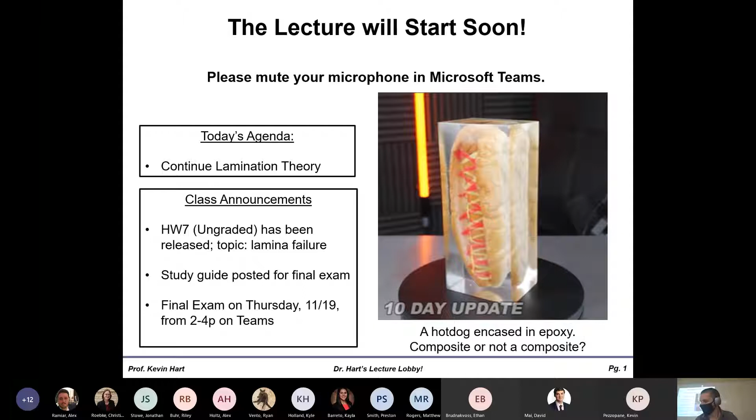All right, let's pick up where we left off. Again, I hope the math pants are being worn today.

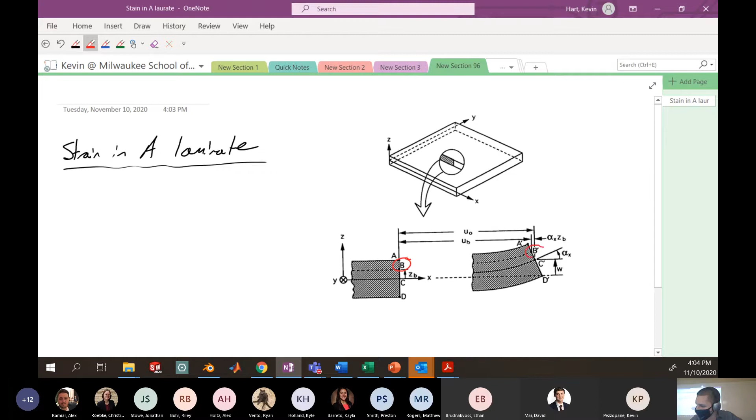So last we left off, we were talking about how to determine the strain at an arbitrary point in the laminate. I'm going to post your favorite picture here one more time—it's one we've beaten to death in this class, but I think it's a nice figure and gives a good picture of what's going on. We've got this plate going from an undeformed to a deformed condition, and we're interested in what the strain is at this arbitrary point in space as we go from B to B prime.

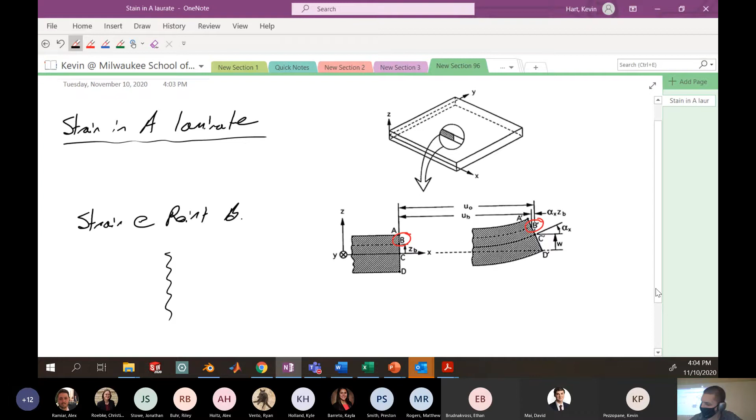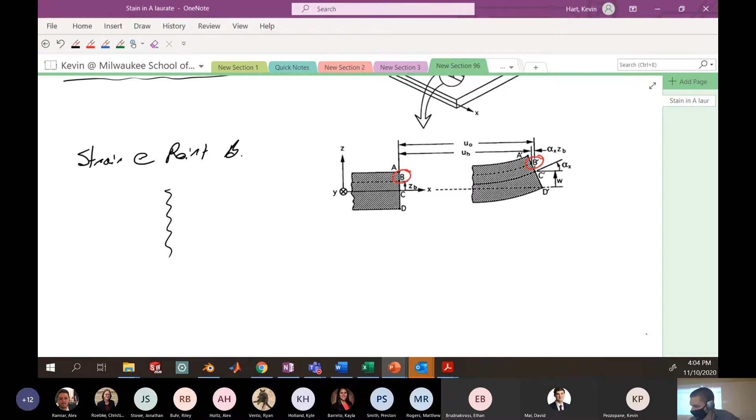We did a lot of stuff—I'm not going to revamp all of it—but more or less we did a full derivation of the strain by determining the displacement at point B before and after deformation, in terms of the curvature and the extension of the laminate. And we came up with this general expression for the strain in this XY coordinate system, and we saw the following.

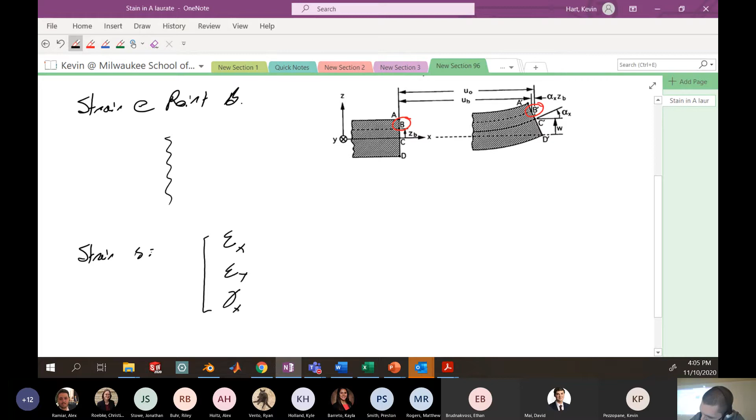In our global XYZ coordinate system, the strain in X, the strain in Y, and the shear strain gamma XY were equal to the midplane strains—epsilon X naught, epsilon Y naught, gamma XY naught—plus the distance the point is away from the midplane, distance Z, multiplied by the curvature of the laminate in the various directions. We're using the variable kappa here: kappa X, kappa Y, and kappa XY.

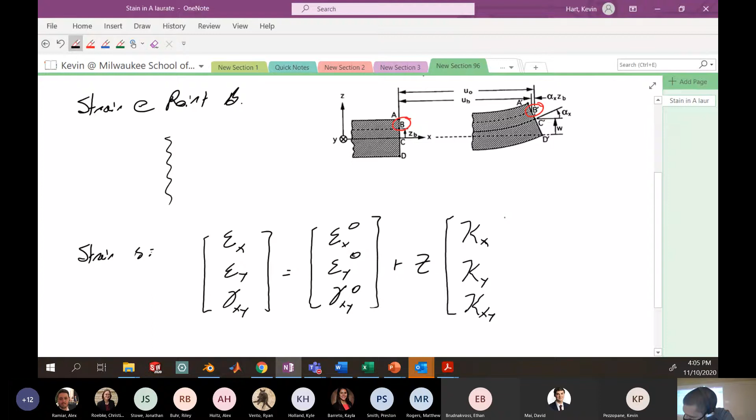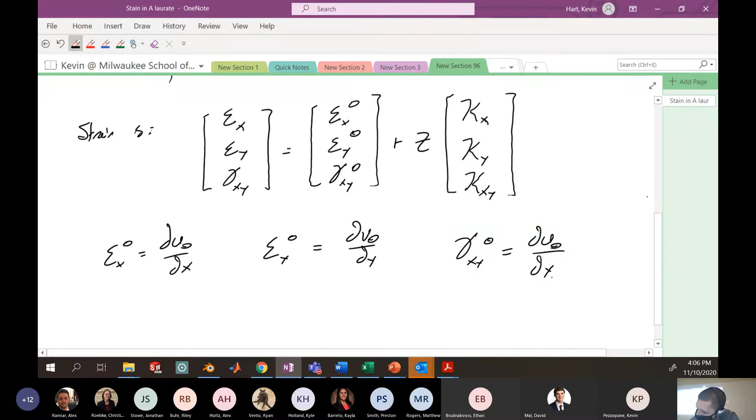We had the following definitions for our midplane strains and curvatures. This was partial U naught partial x, so how much I'm displacing per unit length in the x direction in the midplane. My strain in the y direction at the midplane is how much I'm displacing at the midplane in the y direction for every unit of advance in y. And a similar idea, my shear strain at the midplane is a combination of how much I'm advancing in x with every unit step in y, plus how much I'm displacing in y with every unit step in x.

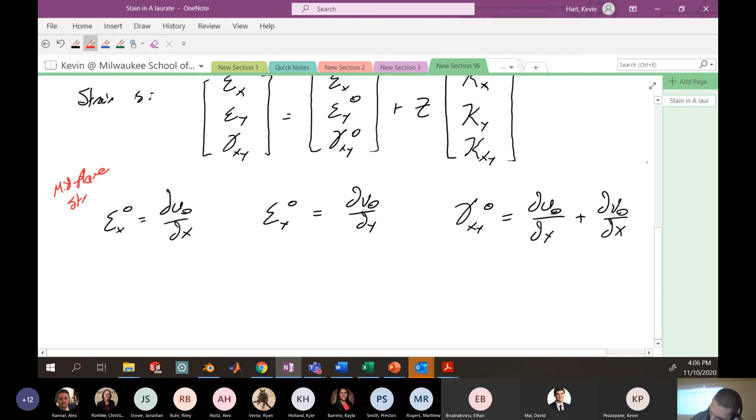All right, so those are our midplane strains. And then midplane curvature, or it's not really midplane curvature, it's just generally curvature, was the following. We had kappa x here.

Kappa x is negative partial squared w, so the second derivative of the displacement in the z direction with respect to x. So this is just a general curvature. You may have seen something that looks like this in your calc class. I don't know if you learn about curvatures in Calc 1 or Calc 2. You guys remember curvatures? I'm getting a lot of blank stares. Okay, I know that was like 3-4 years ago. So, okay, curvature in the x, there you go.

Curvature in the y is negative partial squared w on partial y squared. And this twist curvature, which is sort of like the curvature in shear, is partial squared w with my two partial derivatives, partial x, partial y. All right, so these are my definitions that I'm going with.

Okay, so that's generally the strain that occurs in a plate. Now, we haven't really talked at all about laminate, it's just generally for a plate. So now we've got to look at what's happening at the laminate when we have multiple layers of prepreg that we may have stacked on top of each other. Now we have some sort of expression for the strain and how that develops.

So let's use that and develop an expression for the stress. Stress in laminated composites. This is sort of the next section that we're getting into. This is new material, we're not reviewing any more material at this point.

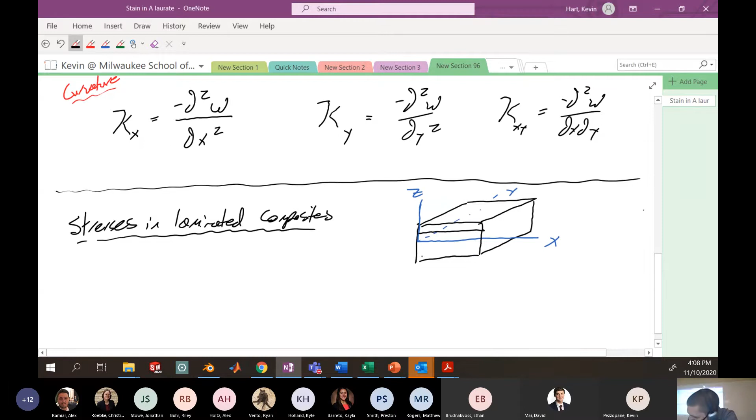So remember that laminate is made up of many, many layers. We've kind of only looked at a full plate, but we'll have to remember that in this class we talk about laminates as composites with many, many layers. Okay, so let's say that we have a 4-layer laminate that looks something like this: layer 1, layer 2, layer 3, and layer 4.

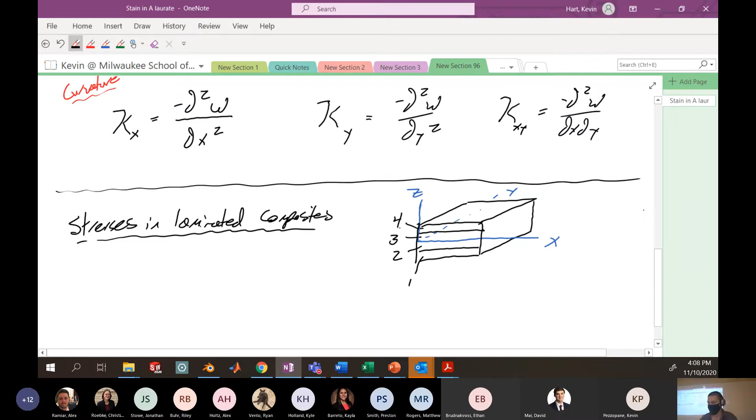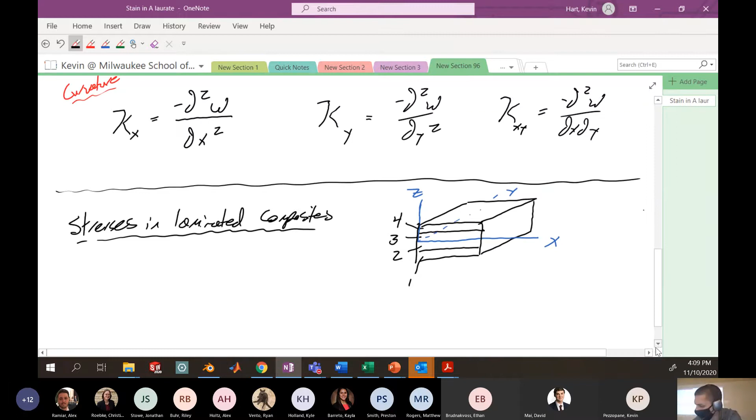And let's say that I'm just at some arbitrary kth lamina. All right, so remember that we could describe any particular lamina of interest as the kth lamina. So let's investigate the kth lamina.

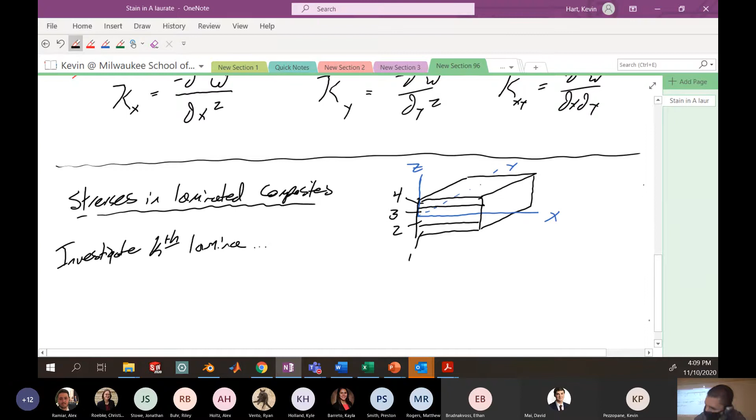Okay, so we know that any particular location inside of the laminate we can define with a variable z. It's the distance above or below the midplane of the laminate. We can use this to define that location for the kth layer with zk. We talked about that when we first defined how to find the laminate. So, distance to kth layer in the z direction is zk.

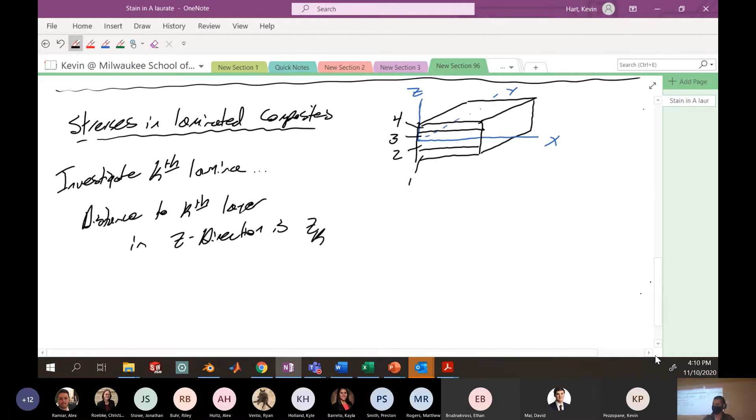So this allows us to define how far away from the center each particular lamina is in the stack, zk. All right, so why is this important? Well, if we know the general strain in the laminate from the definition we just did in the last lecture, we can use Hooke's law to define the stress.

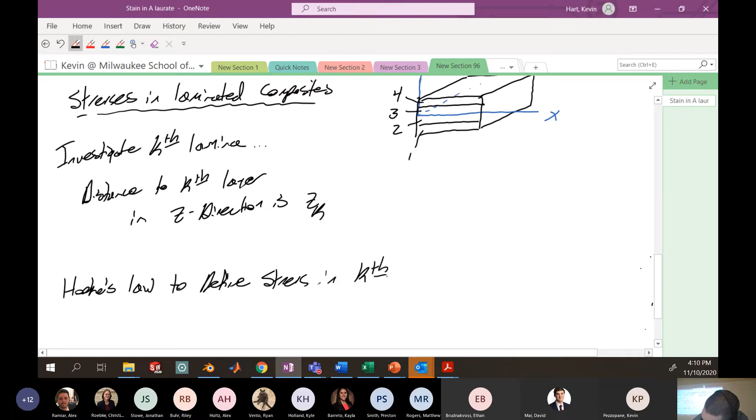So Hooke's law defines stress in the kth layer. And for now, we'll just do this in principal coordinates.

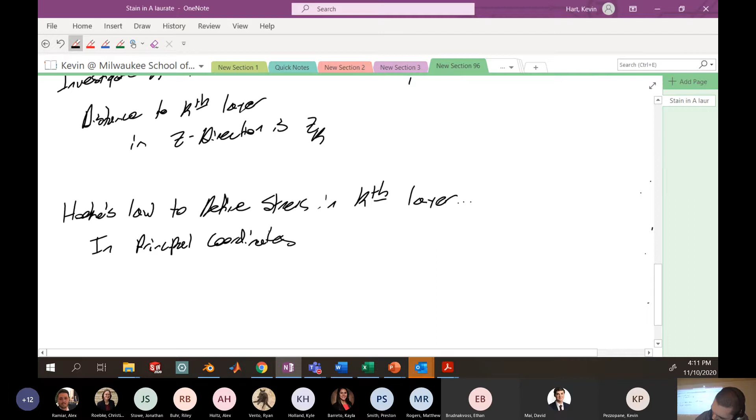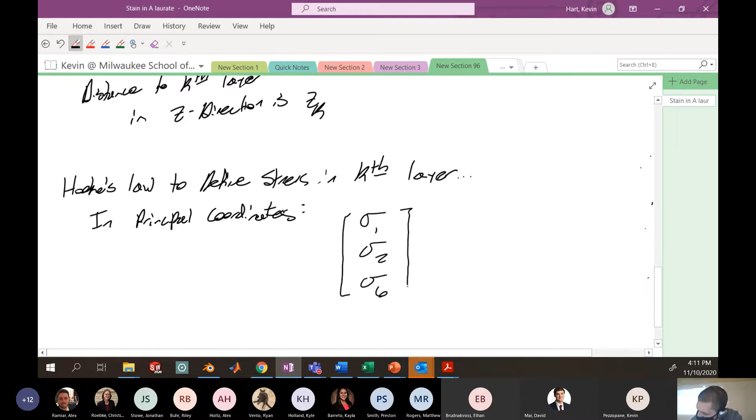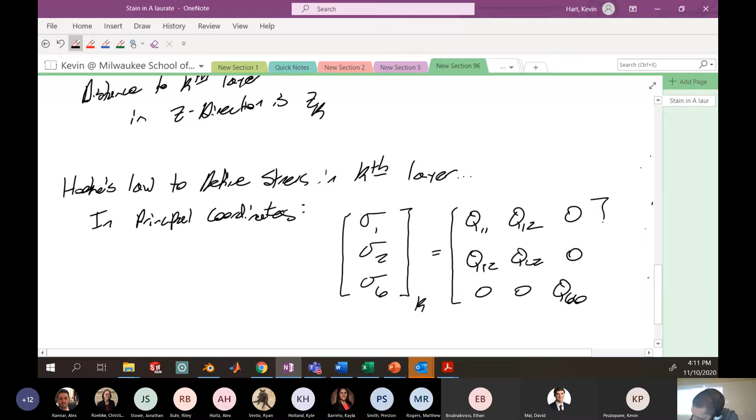Okay, well we know that this is something like stress 1, stress 2, stress 6 in layer K, using the subscript K here. This is the Q matrix: Q11, Q12, 0, Q12, Q22, 0, 0, 0, Q66. This is my stiffness matrix for thin lamina, multiplied by the strain in that particular layer.

So here we'll have epsilon 1, epsilon 2, gamma 6, specifically in the kth layer, right? So this is specifically Hooke's law in the kth layer and principal coordinates, right?

But what I just derived previously was an expression for strain in the arbitrary XY coordinate system, all right? So remember that when we make laminates, the various layers inside the laminate might have various orientations of their fiber direction with the global XYZ coordinate system. All right, we talked about that when we talked about stacking sequence.

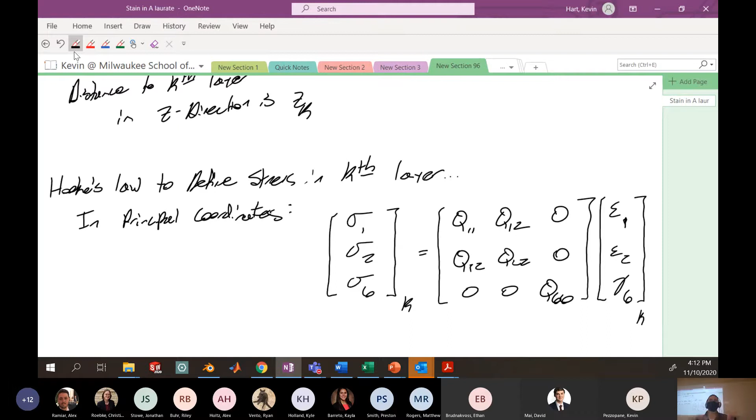If I made a laminate that's 0, plus 45, minus 45, 90, that means the first layer is oriented in the X direction, the second layer is plus 45 from that, the third layer minus 45, etc. Okay, so what I need to do is transform the strains that I know in the XY coordinate system to the local coordinate system of each particular layer to determine the stress in that layer.

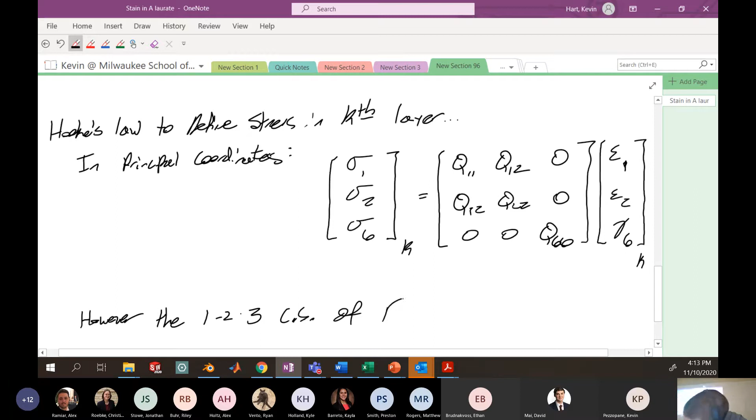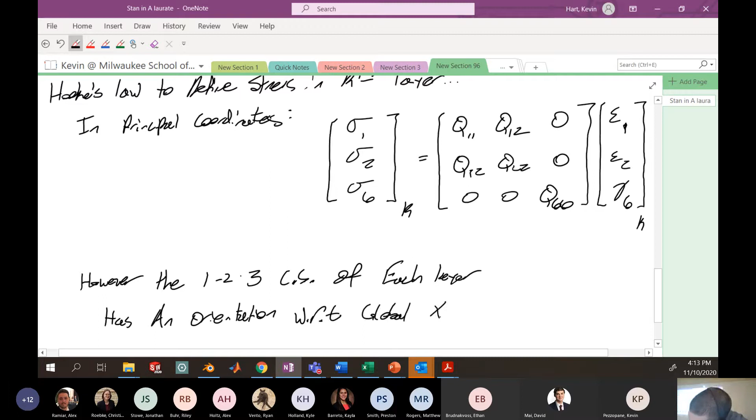Okay, so I'll say here, however, the 1, 2, 3 coordinate system of each layer has an orientation with respect to the global X, Y, Z coordinate system at angle theta k, right? And we sort of talked about this. What is the orientation of the fibers in the kth layer with respect to the global XYZ coordinate system of the whole composite laminate, right?

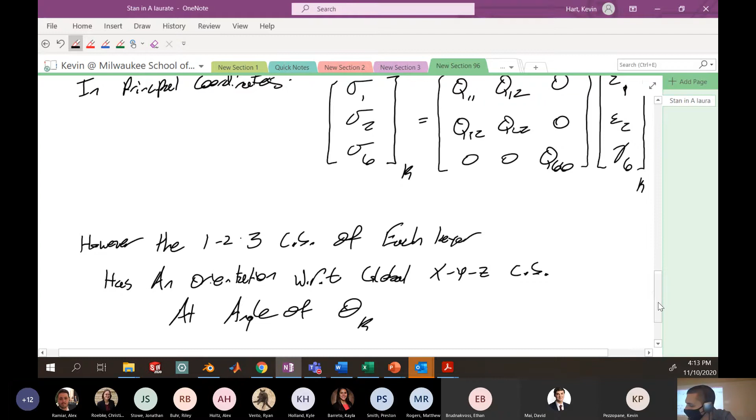So we can transform layer K from its local material coordinate system into the global coordinate system by using transformation theory that we've talked about before. So let's transform what we know about the strains in the arbitrary, or like the global, coordinate system into the local coordinate system.

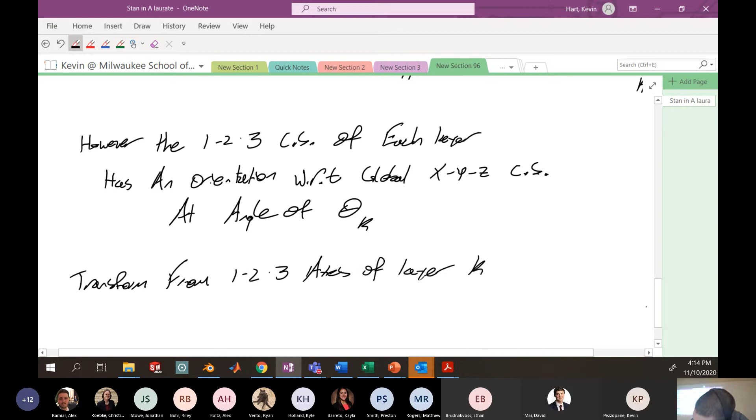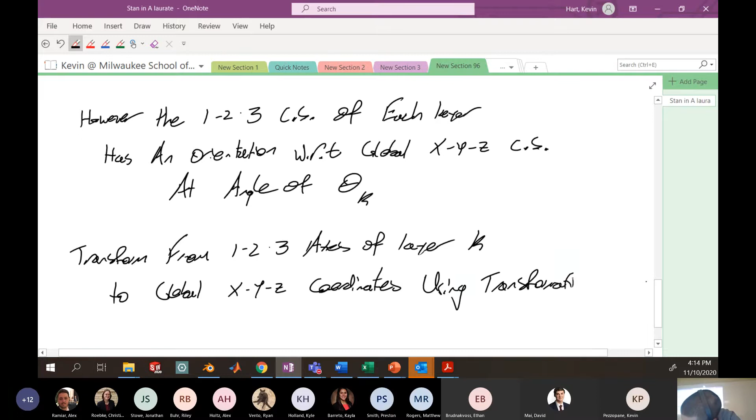Okay, so we're going to transform from the 1, 2, 3 axes of layer K to global XYZ coordinates using our transformations. Okay, that's going to look something like this.

The stress in X, Y, and shear stress tau XY in the global XY coordinate system. All right, so these are specifically the stresses in X, Y, and tau XY for layer K of interest here. One particular layer is going to be equal to my transformation matrix T in plane stress. And it might be a little bit more appropriate to say something like T with the variable of interest here at theta K, inverse.

My plane stress transformation matrix, so this is a 3x3, multiplied by Q for layer K, okay, so it's my 3x3 stiffness of this particular layer K. This is in material coordinates. So let's maybe make this a little bit more clear. I got to make this as clear as possible.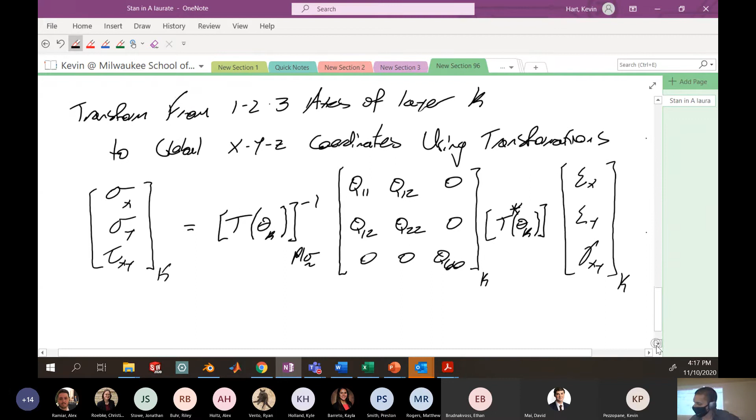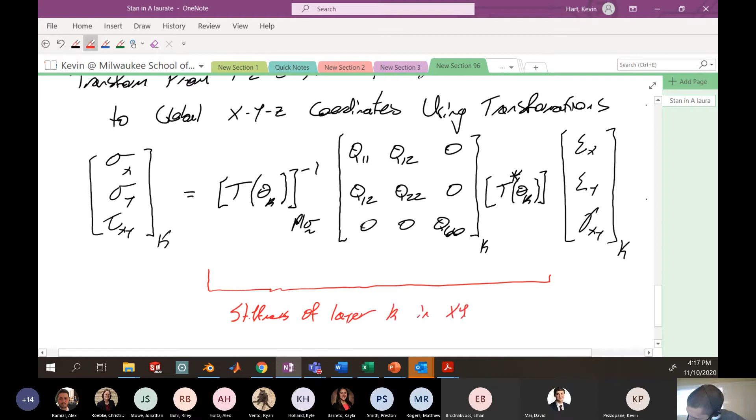So remember that we called this the stiffness matrix in the global XYZ coordinate system for layer K. And remember we called this Q bar. It's usually how we denote it.

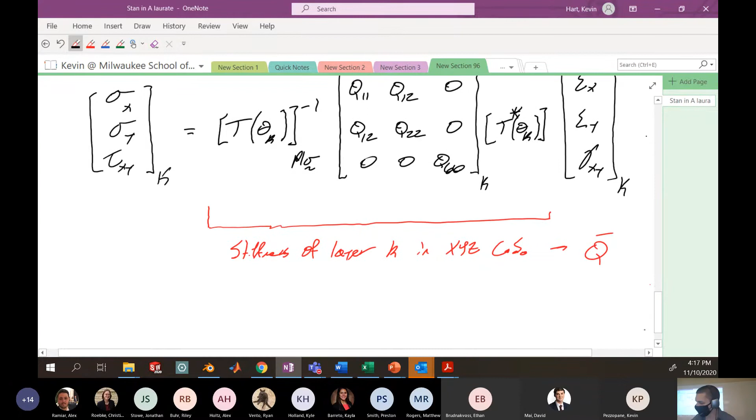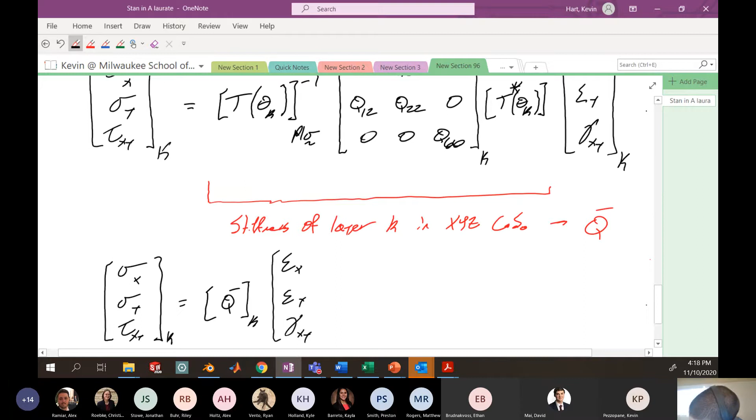Okay, so if we wanted to write this in a little bit shorter hand, we could write something like Q bar of layer K multiplied by strain X, strain Y, shear strain gamma XY, layer K.

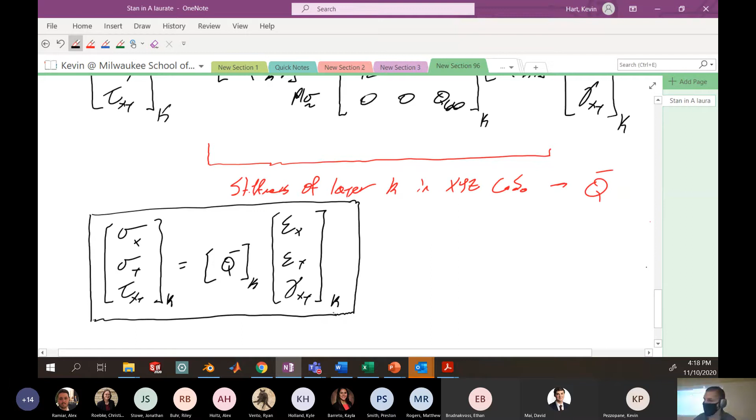All right, so this is kind of an intermediate Hooke's law that we sort of already kind of knew, but I'm just defining it very specifically for one particular layer of interest. Okay, where this is sort of like the stiffness matrix of layer K that has been rotated into the XYZ coordinate system so that we can do calculations appropriately.

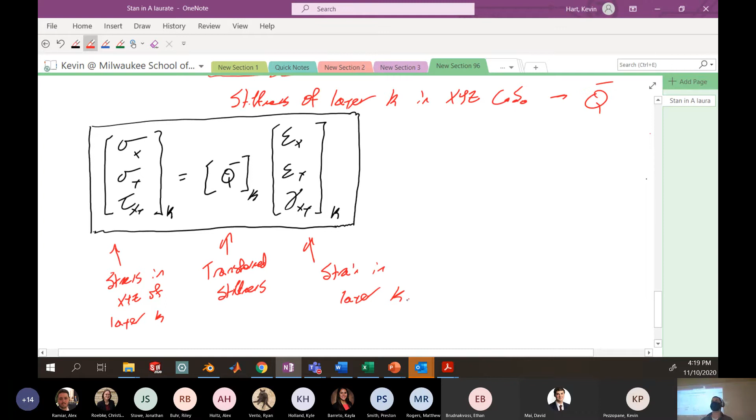So here's the stress in XYZ of layer K. This is my transformed stiffness, and then this is strain in layer K. All right, but I have an expression for the strain in layer K that I can sort of expand on at this point.

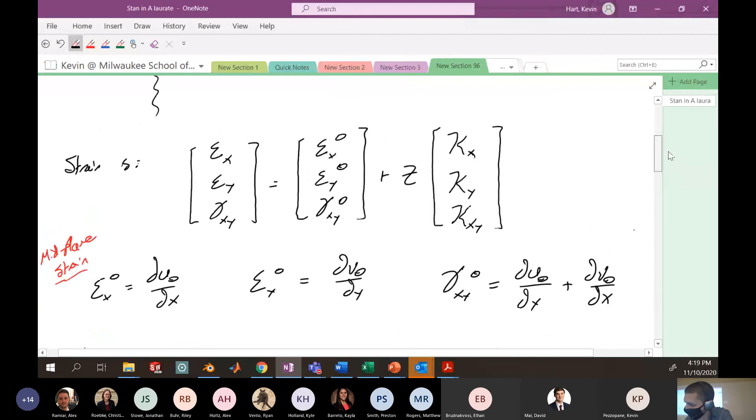Okay, specifically, the substitution we're going to do is that I know the strain in layer K can be written using the distance away from the midplane, ZK. My previous definition of strain is this. So all I'm going to do is put subscripts K on that definition of strain and see what pops out.

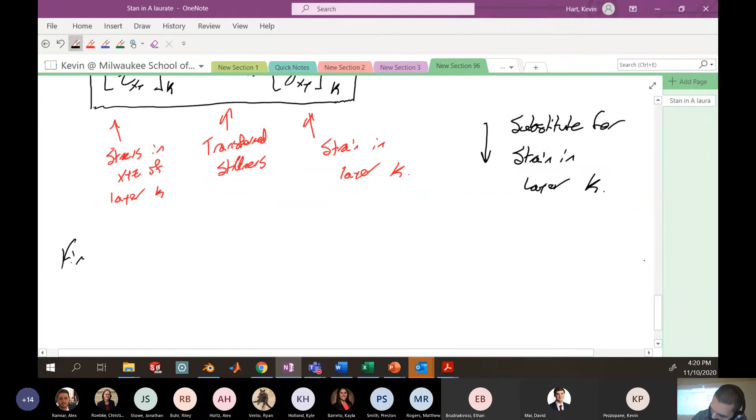So leave yourself some space here. This one's pretty tight.

The stresses in the global coordinate system of layer K are going to be equal to this Q bar matrix of layer K multiplied by the expression that I have for the strain.

And remember, that expression is something like the midplane strains plus the distance away from the midplane, which we're calling ZK, multiplied by the curvatures: kappa X, kappa Y, kappa XY.

I can distribute this, and you're left with kind of the shorthand version of this full relationship between the stresses that develop in layer K and the strains that we have in our laminate, given the stiffness of the individual layer K.

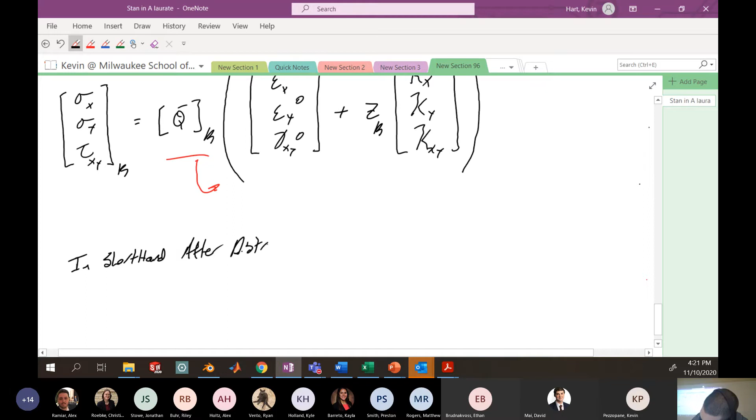So finally, in shorthand, after distributing Q bar, you're going to end up with what we have here.

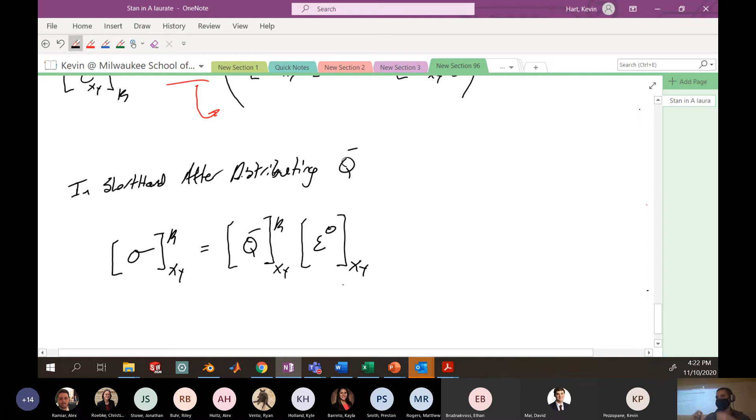This is the stress, usually written this way, of layer K in the XY coordinate system. This will be equal to the rotated stiffness matrix Q bar in the XY coordinate system of layer K, multiplied by the midplane strains of the laminate in the XY coordinate system. Notice there's no specification for layer K here because these midplane strains are just what's happening at the midplane.

Plus your distance away from the middle, we call this ZB or ZK, your distance away from the midplane, multiplied again by your stiffness matrix Q bar XY of layer K, multiplied by the curvatures which develop, kappa XY. Again, not specific for any layer K for the curvatures, because this is for the global plate itself.

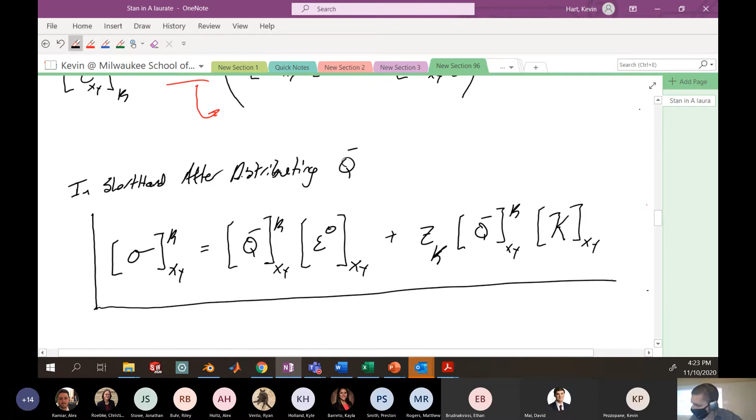So here's your full relationship between the stress that develops in layer K and the strains that develop.

Okay, so let's drive home each one of these terms. This is off axis, so global coordinate system, stress in layer K.

This Q bar K term, this is off axis lamina stiffness, layer K. This term here is the longitudinal midplane strains.

Okay, so that's how much the laminate is expanding and contracting at the middle. This is your distance away from the center of the laminate, so this here is distance of lamina K from midplane.

This we've already defined. And this guy here, this is the laminate curvatures.

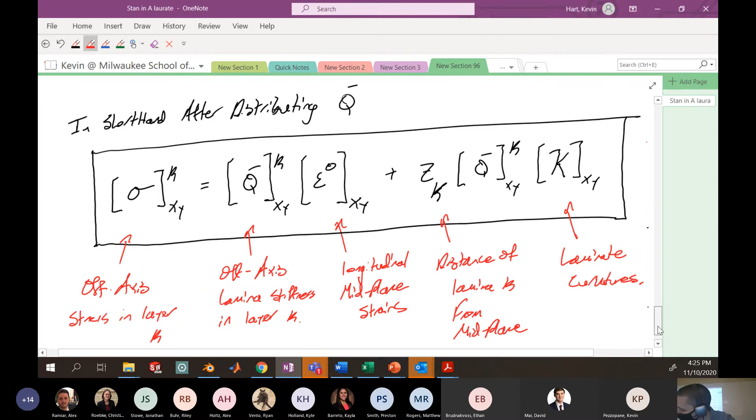Just like the derivation of strain in a plate, it's just very obvious, it's just obvious. Don't stop, hammer time. All right.

Yeah, we got a bunch of gobbledygook here. Sure, fine, let's put some physical meaning to all of this stuff, okay? And let's actually look at what a stress distribution and a strain distribution in a laminate might actually look like.

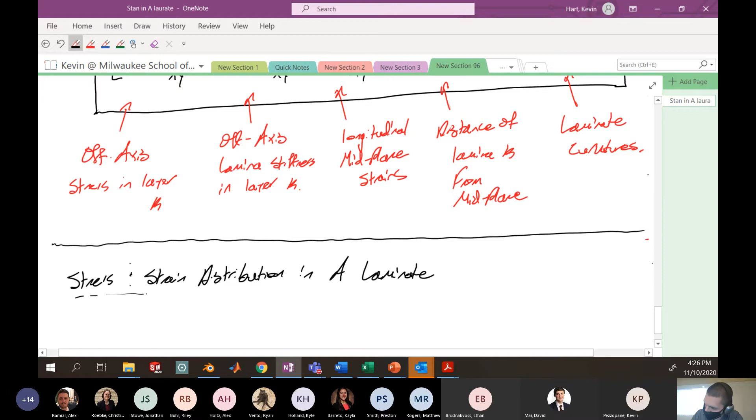So this is stress and strain distribution in a laminate. We're going to do our best to put a physical meaning to the equations that we just drew. Okay.

So remember an assumption that we made, that strain is continuous through thickness.

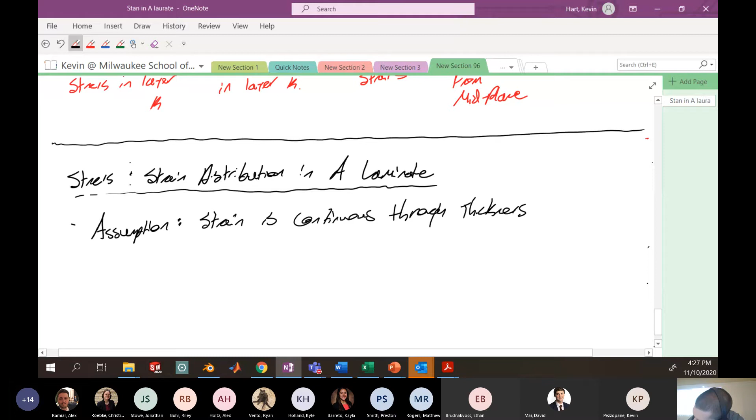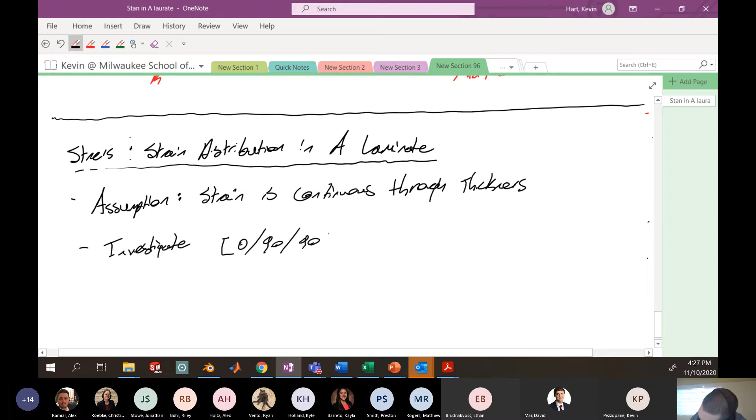Right, and let's assume that we have a multiple layer laminate. Let's say that we have like a 0-90-90-0 laminate. And let's investigate.

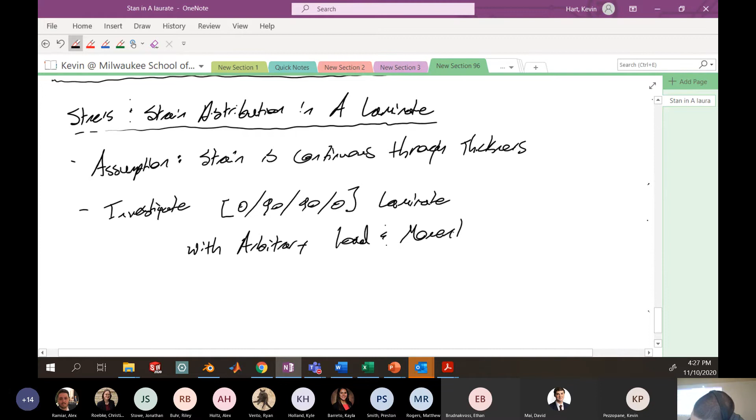With arbitrary load and moment. All right, so what do I mean by that?

All right, well, let's draw a picture because pictures are great. So here we have some side view of some laminate, X direction, Z direction. And let's say that we're going to load this particular guy.

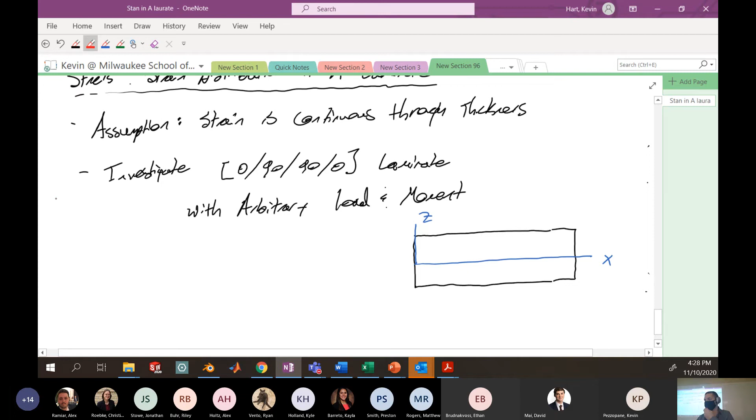Going to put some tensile force in the X direction. And let's say we apply some bending moment, My, bending moment My, that's applied on this guy.

And we know that we have a 0-90-90-0 laminate, so we can separate this into 4 layers. So this here is like a 0 layer, this is a 90 layer, this is a 90 layer, and this is a 0 layer. Okay.

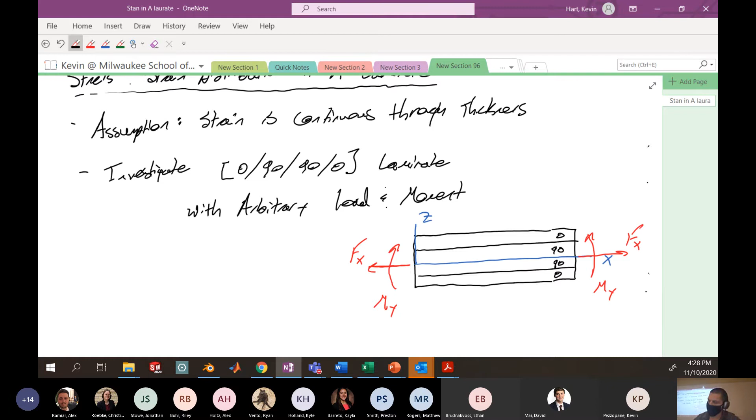So what we're going to do is look at the strain and the stress distributions of the laminate. So for strain distribution,

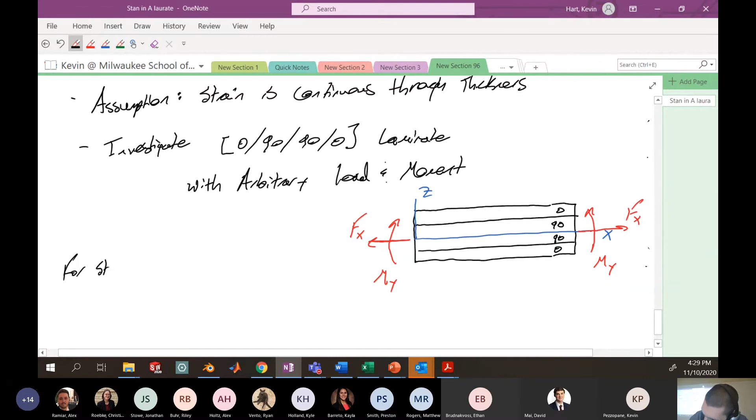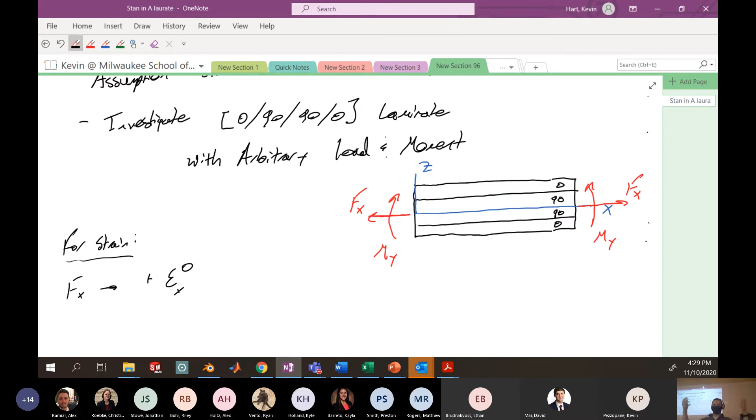you're going to have something like Fx giving you a positive mid-plane strain in the X direction. I'm pulling on this thing, so the mid-plane portion at the middle of the laminate is going to extend and strain in the X direction. I think that's pretty obvious to see.

The moment Y that you apply is going to give you some curvature, but basically we're going to have more strain at bottom than top, and it's going to be a linear distribution.

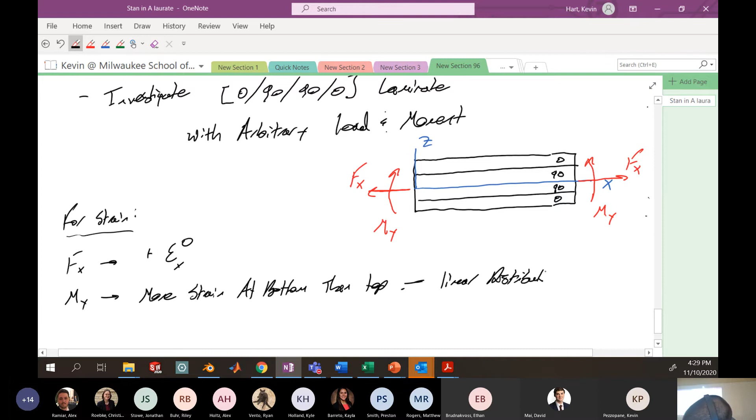Okay, so if I had to draw these things, I might assume that the force is going to give me some strain in the X direction that looks like that. And from the moment, I'm going to get something that looks like this.

Hopefully you're hearkening back to your 3005 days and remembering how loads and moments apply strains to your piece. So this is from moment. This is from load.

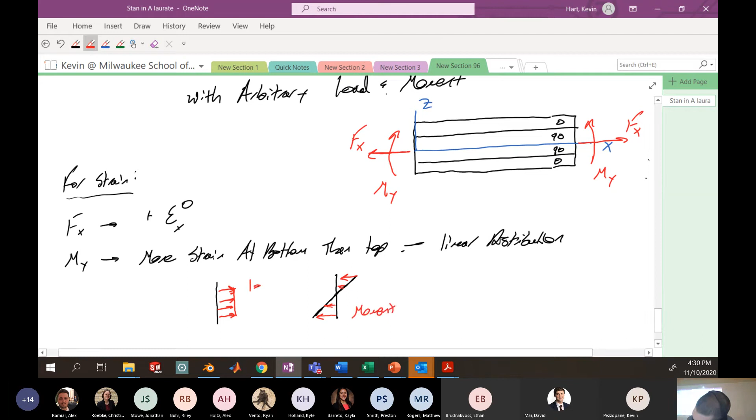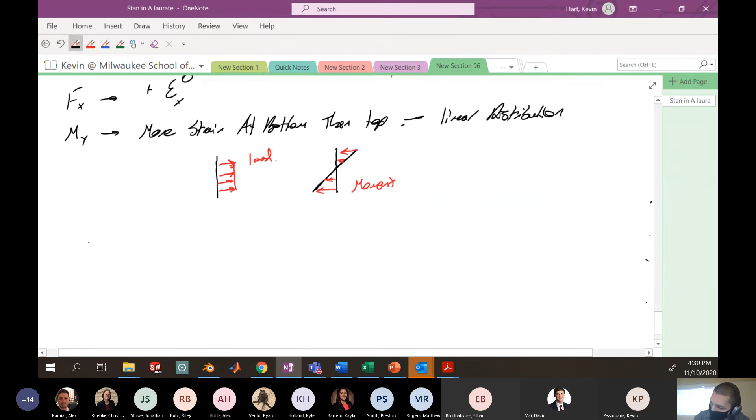All right, so let's draw what that distribution actually would look like on this particular piece. I'm going to blow this way up.

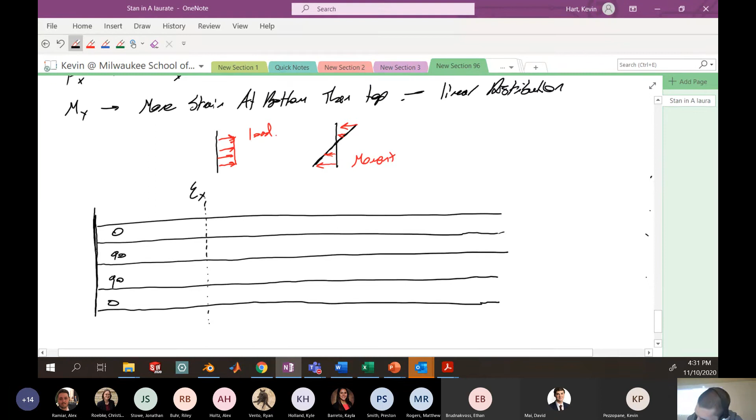So let's say that this particular line represents some nominal strain in the x direction. This is maybe not the best figure here. I'm actually going to get additional tension on the bottom, so it's probably better to draw the arrows this direction. Yeah, it's probably a little bit better.

Okay, so I get a lot of tensile forces on the bottom here, and on the top, I'm canceling out from the compression that comes from my moment. Come on, eraser. All right, I got compression on the top.

So my distribution is ultimately going to look something like this for my strain. Let's pretend that that's what my strain distribution looks like through this guy.

Actually, let's do it the other way. Sorry, I'm giving you the run around here. Okay, there you go. There's your strain distribution in the laminate.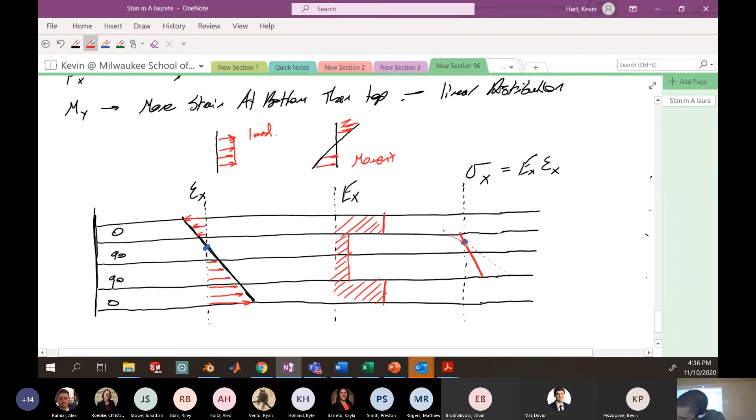Oh, sorry. I wish I had a fatter marker here.

Okay, so this is supposed to represent the stress distribution in this laminate as you're moving through. In these particular layers, like here and here, because the modulus is lower, but my strain distribution is still continuous, I have a generally shallow slope here, where this slope is something like epsilon x times Ex for the 90-degree layer.

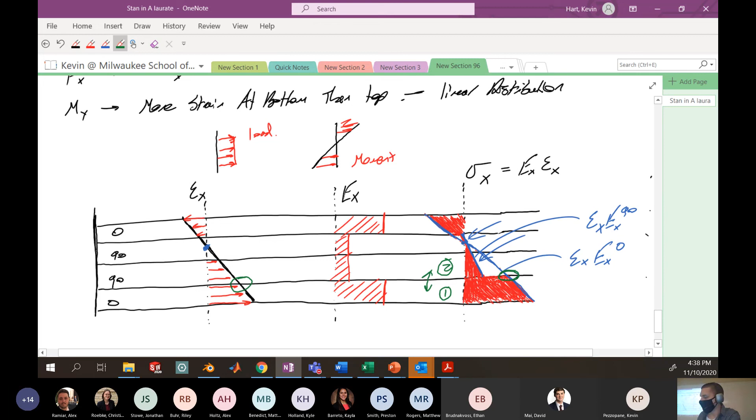So here we see right below that second layer, my stress is some value, and then right above that second layer, my stress is some other value. So the strain distribution is continuous.

The modulus values jump from layer to layer, and that causes discontinuities in the stress distribution.